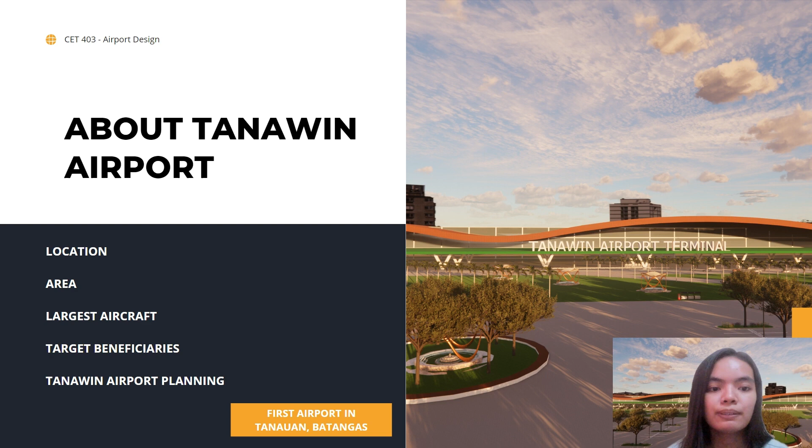Good day, everyone. We are the proponents for the proposed airport in Tanauan City, Batangas. I am Son of Faith P. Buku, together with my team, Charles Dave Gutierrez, Bon Jerome Moren, Neil Encabo, Carl Joshua Garcia, and Kyle Duffy Saison, to introduce the plan and design of the Tanawin Airport. The proposed name for the first airport facility in Tanauan, Batangas is Tanawin. I will further explain the details of the airport design in the succeeding slide.

First, the selected location for the airport is in Patlay, Matanda, Tanauan City, Batangas, with an approximately 4.79 square kilometer area and 8.71 kilometer perimeter as shown in the figure. The largest aircraft to be accommodated and considered in the capacity of the components included in the airside is the Boeing 777-300ER. Next, for the target beneficiaries, the proposed airport has envisioned to benefit the local community, the local businesses, the global market in terms of industrial and commercial trades and the service of aircraft beneficiaries.

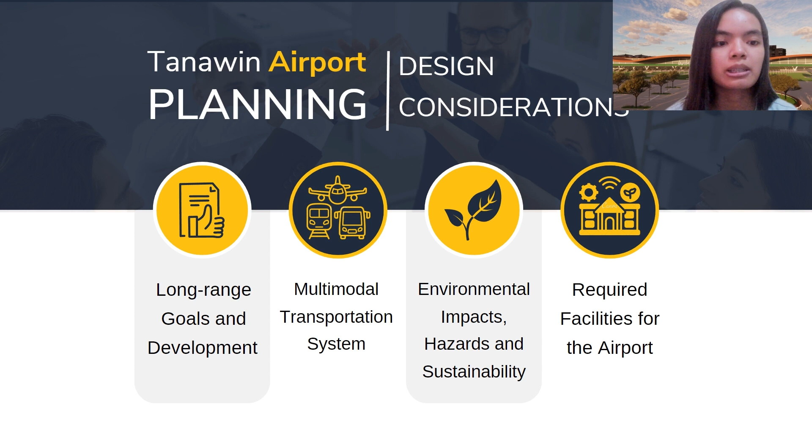Next, in the planning phase of the airport design, we have considered the flows in the two major components of the airport, which are the airside and the landside. The airside design should consider the flow of aircraft, the runways, taxiways, aprons, and hangars. Meanwhile, the landside part shall comprise of the people flow consideration in the terminal building and the flow of land vehicles. Other design considerations include the long-range goals and development, multimodal transportation system, environmental aspect of the design, and the required facilities for the airport.

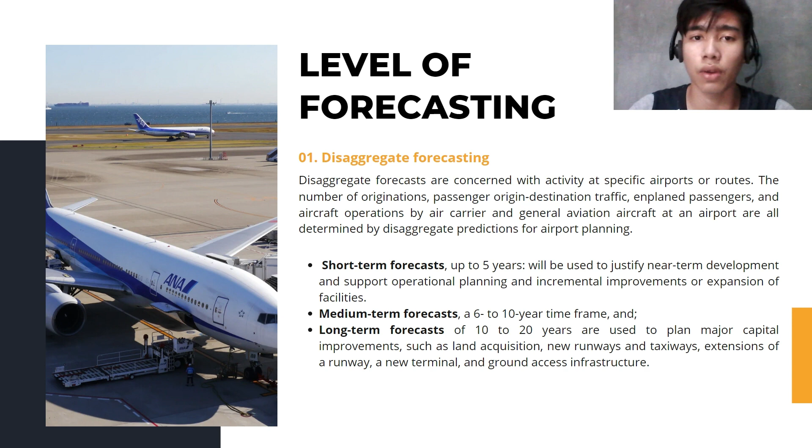The level of forecasting applicable is the disaggregate forecasting, where we are concerned with the activities at specific airports or routes: the number of originations, the traffic density, enplaned passengers and freight operations. We also need to specify the design years. Is it just for a short-term forecast, medium-term, or long-term forecast? And the least expensive and most attainable forecasting method is the market share method, where we just proportion large-scale aviation activity down to a local level.

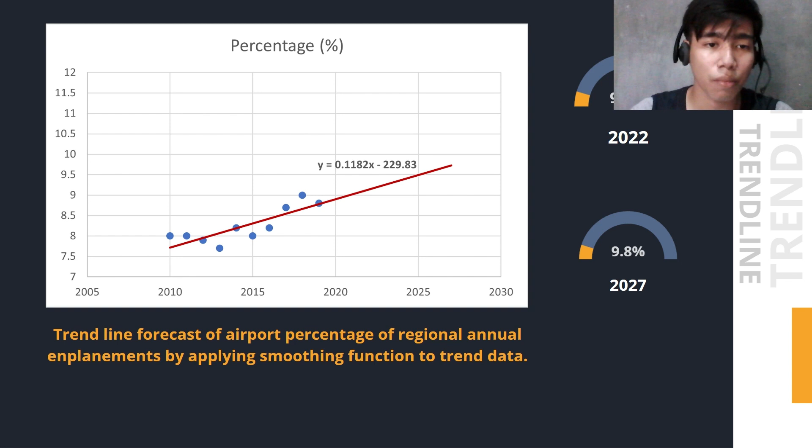Once we projected the function through percentage, we will need existing quantity of enplanements to perform the proportioning. From CAAP, 2019 has 49.88 million, 2018 has 48.67, and 2017 has 42 million enplanements. And the final step on market share method uses extrapolation. Using the trend line in the previous section shown, it indicates regional annual enplanements at year 2022 of 51.98 million and by year 2027 of 55.32 million. So this is not the final result. The actual forecast is multiplied by the percentage of growth, about 4.8 million passengers by year 2022 and 5.4 million by 2027. That will be all for forecasting for airport planning.

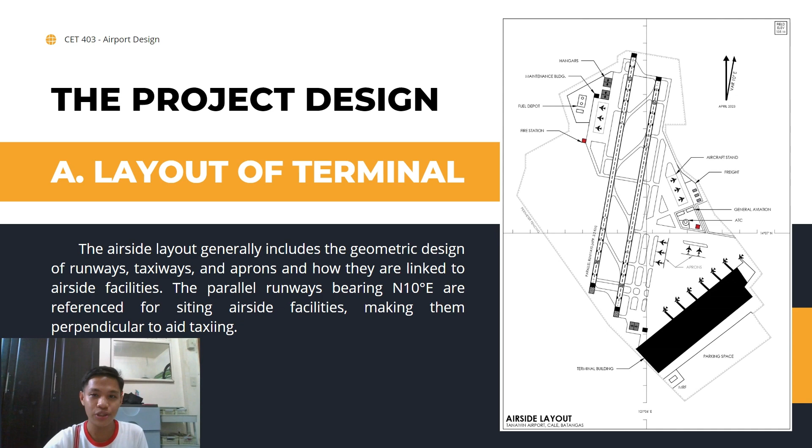We now proceed to discussing the project design for Tanawin Airport. Now let's proceed on the project design. The layout of the airside as seen in the figure includes the geometric design of runways, taxiways, and all the included facilities. As you can see, all the facilities mentioned earlier were clearly identified in this figure. The orientation of the airport is north 10 degrees east. The layout of terminal should consider the fluidity of the passenger flow throughout the airport terminal. The space programming for the arrival floor and the departure floor will be discussed.

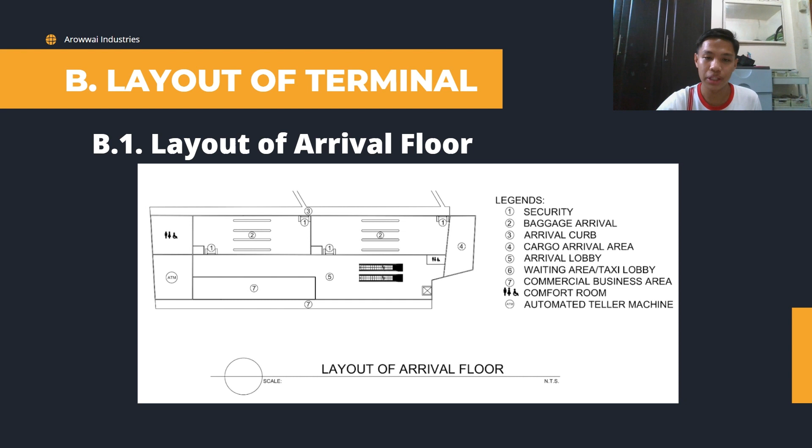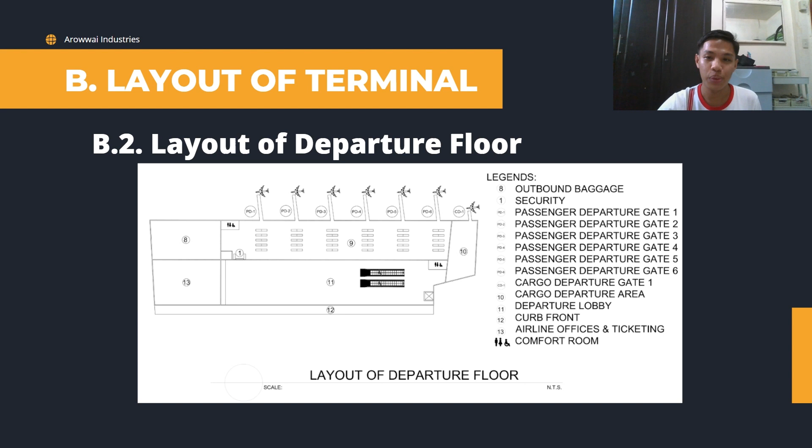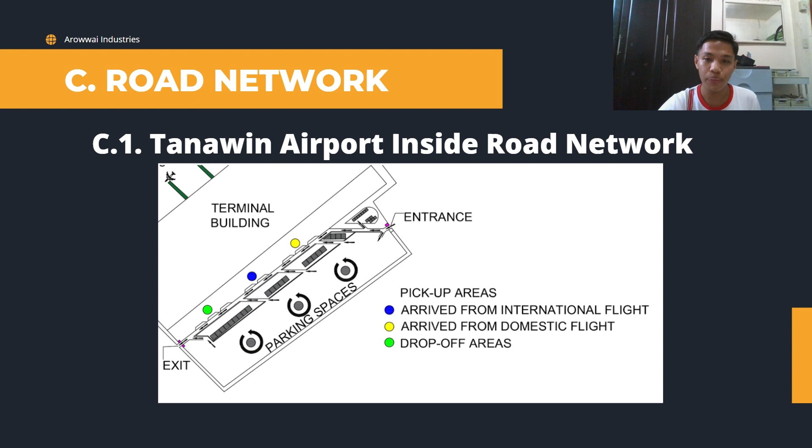Next slide, please. Let's proceed on the road network of the proposed Tanawin Airport, which is divided into 2 road networks, the inside and the outside road networks. For the inside road network, upon entering the airport, there are 2 different roads which branch to the parking space provided and the pickup areas. The parking has an entrance separated from its exit to provide a smooth flow of vehicles. As you can see in the figure, there are designated pickup areas. Yellow depicts the area for the passengers who arrive from domestic flights, whereas blue represents the pickup area for the passengers who arrive from international flights. And lastly, the drop-off area is in green color.

For the external road network, the access roads link to the road leading to the Southern Tagalog Arterial Road (STAR) Tollway and are designated as 2-way roads. However, General Luna Road will be designated as a one-way road to have an efficient flow of traffic considering the number of intended users of the airport.

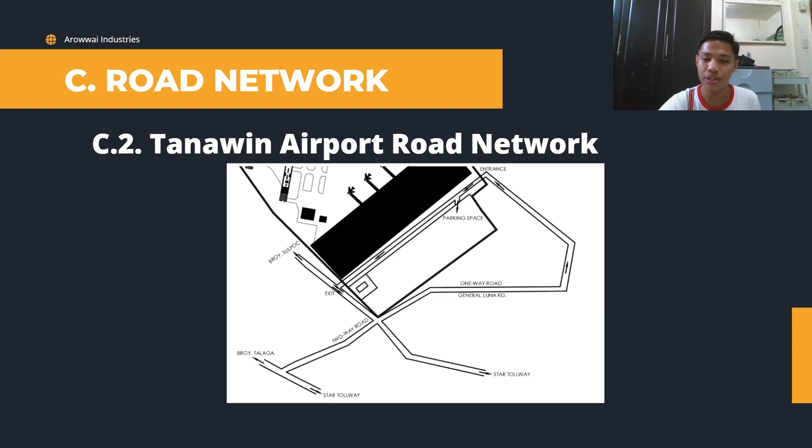For the hazard report, there are 2 hazards that may greatly influence the construction and operation of the airport. Those are the wind velocity and the seismic. The wind parameter in the location has been assessed through the hydrometeorological hazard, which indicated that Tanauan City, Batangas is subjected to severe wind hazards from 117.1 to 220 km per hour wind velocity for a 20-year return period and

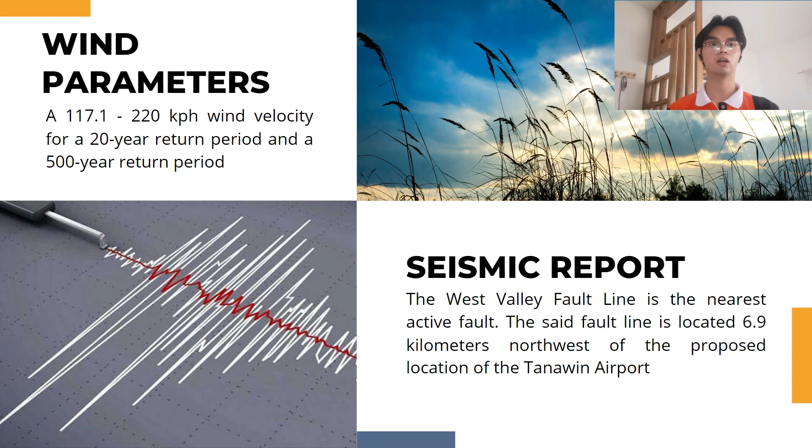a 500-year return period. On the other hand, the West Valley Fault line is the nearest active fault, which can be traced along Tanauan City, Batangas at 6.9 kilometers northwest of the proposed location of the Tanawin Airport, which is shown in Figure 12. Next, based on the map, the site lies at intensity 8 or higher on the PHIVOLCS Earthquake Intensity Scale or PEIS, with very destructive to devastating ground shaking. This is justified by the distance of the site from its nearest active fault, considering intensities during various earthquake scenarios.

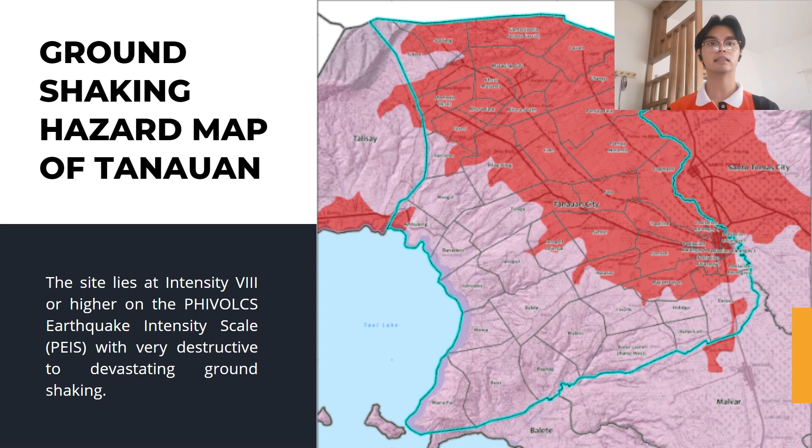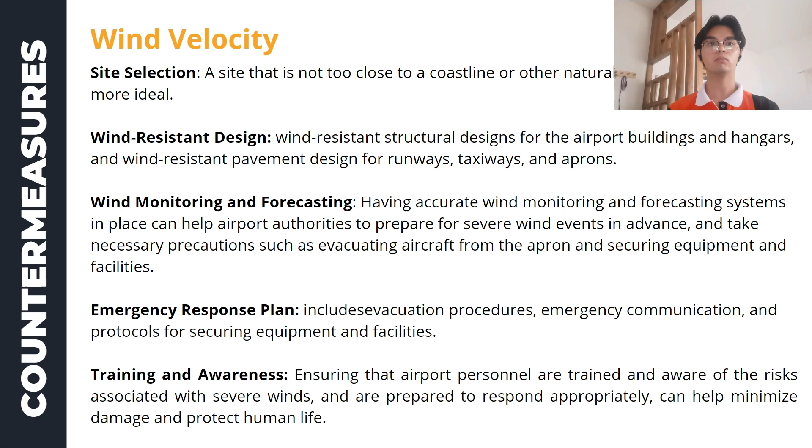For countermeasures of the wind velocity and the seismic, for wind velocity we have site selection, wind-resistant design, wind monitoring and forecasting, emergency response plan, and training and awareness. And on the other hand, we have for the seismic, first is the seismic design, ground improvement, emergency response plan, equipment and infrastructure protection, and monitoring and maintenance.

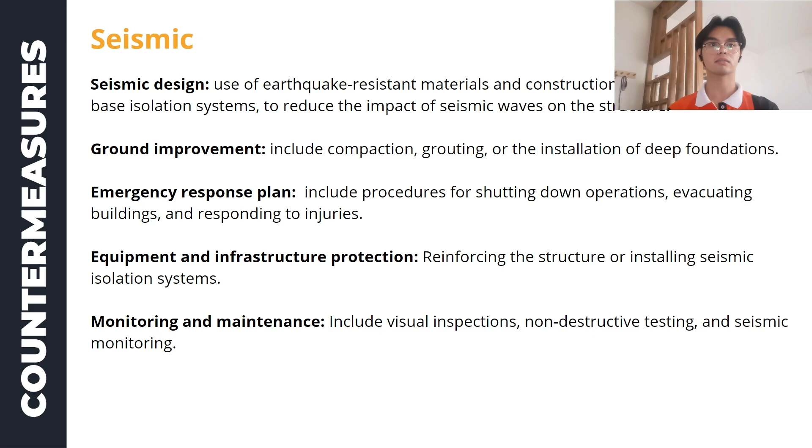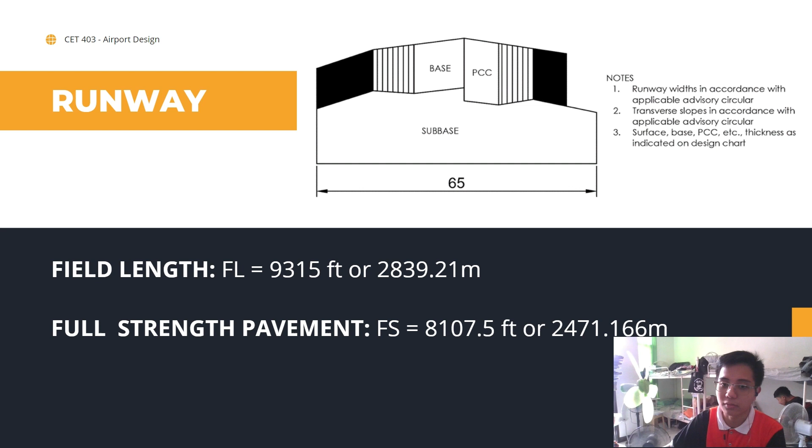Now, here provided are the list of facilities, considering their designs, discussing also their capacities as presented for the following slides. For the runway, it is considered for the specifications of lift-off distance, distance to height of 35 feet, stop distance, from the different considerations of normal takeoff, engine failure takeoff, normal landing, and obtaining the maximum for the field length and full strength pavement, we get the following considerations: for the field length, 9,315 feet or roughly 2,800 meters, and the full strength pavement length of 8,107.5 feet or roughly 2,500 meters.

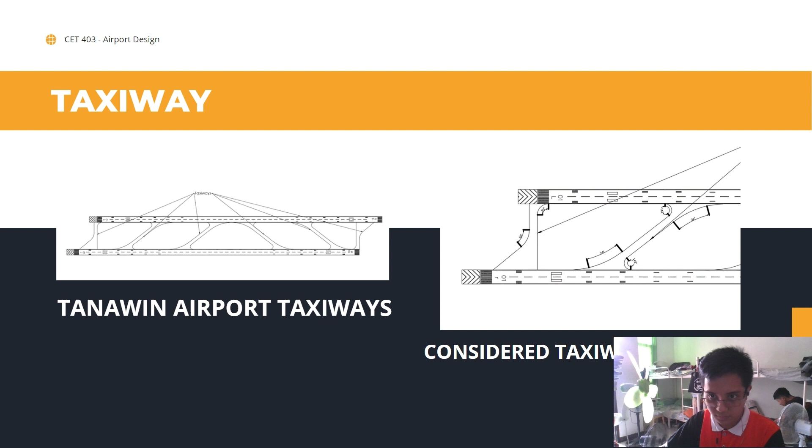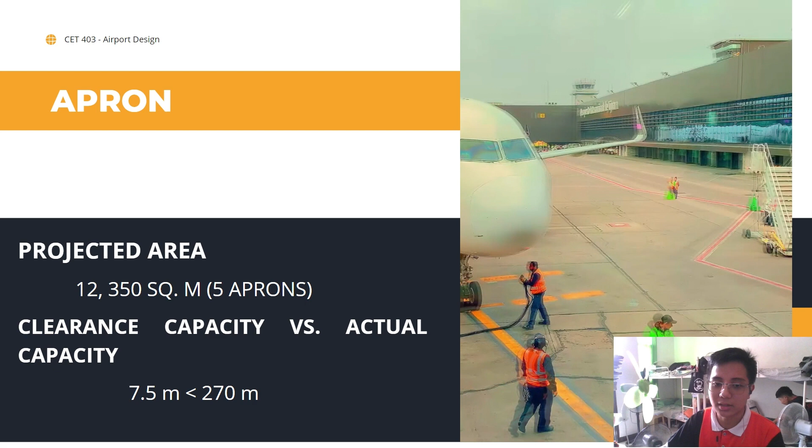Now for the taxiway, herein provided are the general considerations of Tanawin Airport taxiways, as well as the considered taxiway geometry. For the hangar, we intended to have the projected area of 5,750 square meters consisting of 6 hangars. For the apron, we intend to have a projected area of 12,350 square meters consisting of 5 aprons while considering the clearance capacity versus the actual capacity of 7.5 with less than 270 meters. Next, for the aircraft stand, we intend to have a projected area of 530 square meters, having approximately 3 to 4 aircraft parking slots.

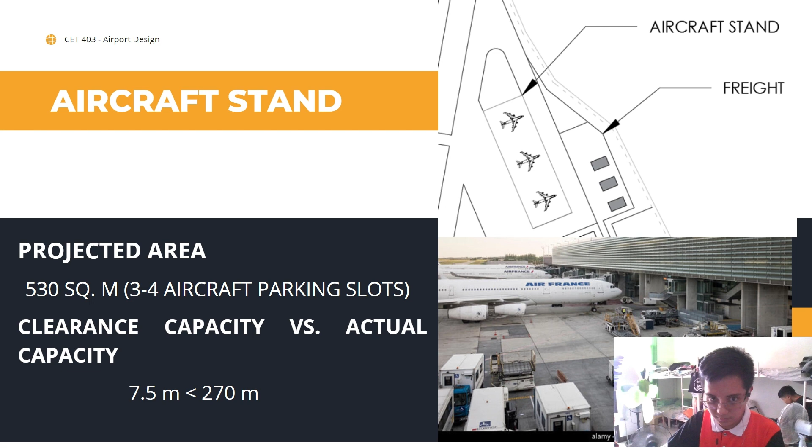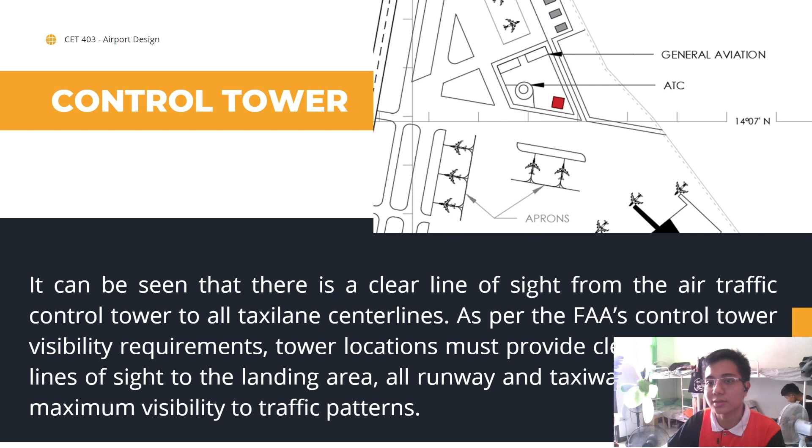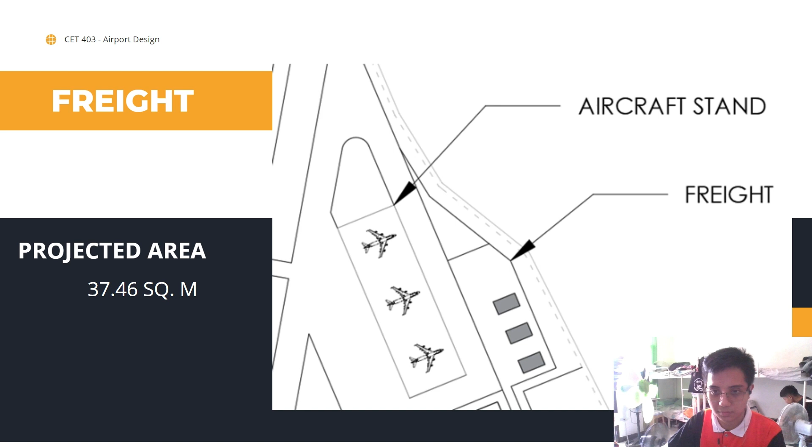For the control tower, there should be a clear line of sight from the air traffic control tower to all taxi lane center lines as per Federal Aviation Administration's control tower visibility requirements. Tower locations must provide clear, unimpeded lines of sight to the landing area, all runway and taxiway surfaces, and maximum visibility to traffic patterns. Next, for the freight projected area, we intend to place it near the apron with a projected area of 37.46 square meters. For the maintenance building, it is desired to have a projected area of 1,500 square meters upon the consideration of site constraints and its proximity to the apron, as stated earlier.

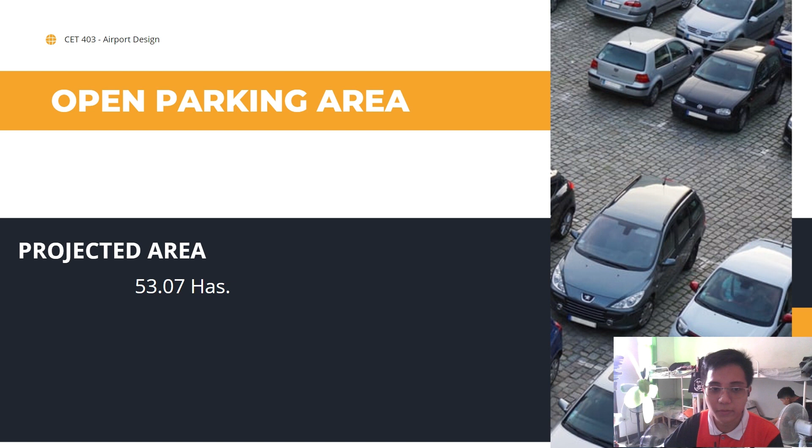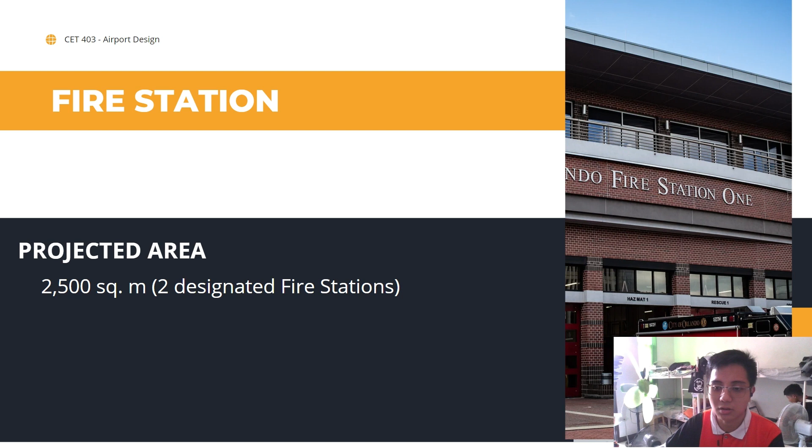Now for the open parking area, to provide continuity as well as to reduce carbon footprints, employing one-way distribution of traffic, reducing the flow, we have considered a projected area of 53.07 hectares. Now for the terminal building, considering the departure and arrival on a two-story basis, we intend to have 72.37 hectares of that. For the fire station, consisting of 2 designated fire stations, we intend to have 2,500 square meters of projected area. For the fuel depot, the allotted area for the vertical tanks consisting of 2,000 liter storing capacity is 14,300 square meters.

Moreover, the general aviation should consider the use of public airports with no scheduled services or less than 2,500 boardings per year. The NPIAS includes around 88% of general aviation airports, which will be also employed in the design of facilities of general aviation. Lastly, for the waste management facility, every airport must manage garbage, and putting in place efficient and cost-effective waste management techniques involves several obstacles. Successful airport waste management implementation has the potential to benefit airport authorities, customers, and the larger community by reducing and eliminating waste footprints outside, for example.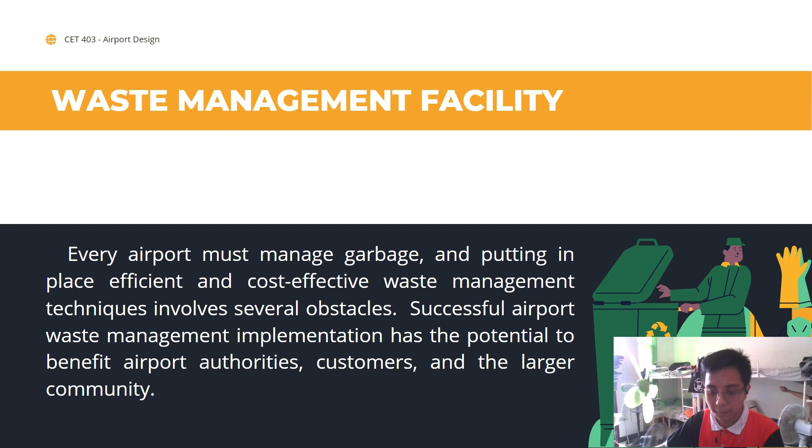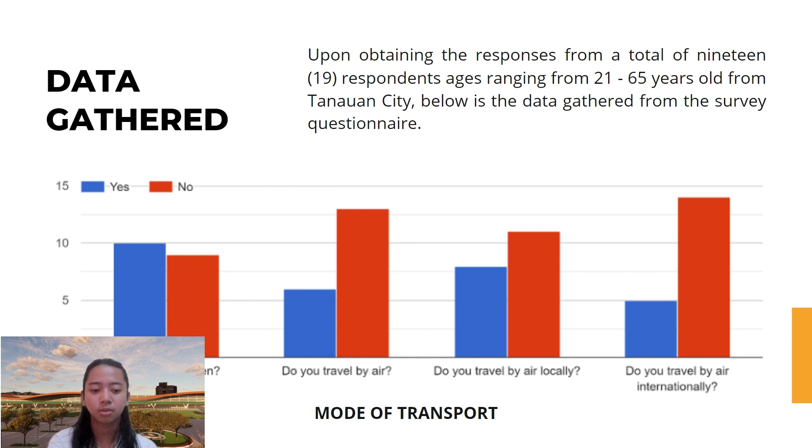So for the methodology, we use the survey questionnaire. For the data gathered, upon obtaining the responses from a total of 19 respondents, ages ranging from 21 to 65 years old from Tanauan City, below is the data gathered from the survey questionnaire. So we have 4 questions. Do you travel often? Do you travel by air? And do you travel by air locally and internationally? So almost half of the respondents do not travel by air locally and internationally. However, this will not be a hindrance to the proposed airport because of the following questions.

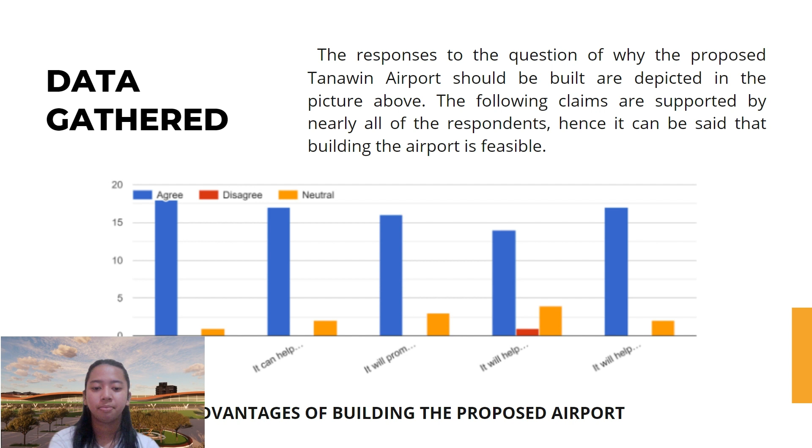First is the advantages of building the proposed airport. Almost all of the respondents agreed with the statements that there is an advantage of building the proposed airport in their community. Next, we have the disadvantages of building the proposed airport. Some of the respondents agree with the following statements. However, these disadvantages may be resolved through countermeasures in order to alleviate the possible risks to the community.

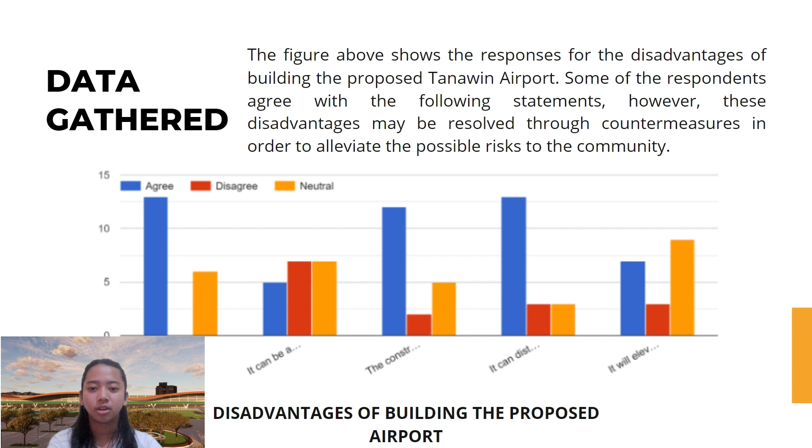So that is all for our group. And again, we are Group 6 proposing the Tanawin Airport.